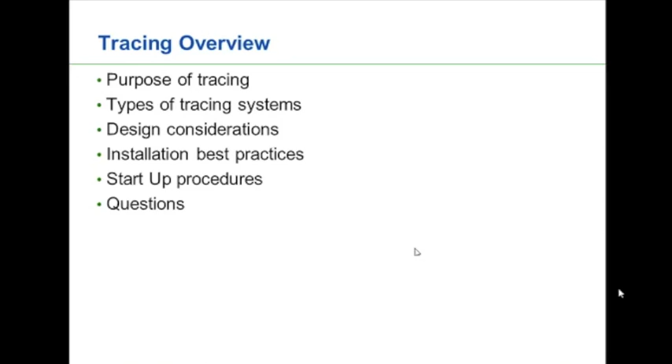Some of the things that you can actually find as you get into some of the really low temperatures, you move up into the Yukon, the Northwest Territories, Alaska, places like that, we might even see tracing put in on steel girders and steel beams to help prevent structural failures due to the really low temperatures that you can see up in that part of the world.

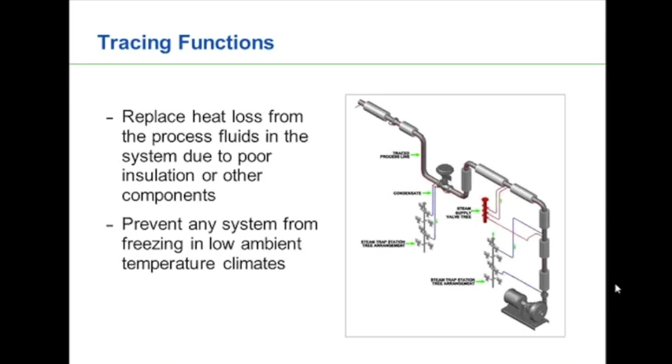It's a very, very efficient way to run tracing. All the exterior surface of that tracing tube is exposed to the process fluid. So obviously we're getting a lot of heat transfer there. We're not relying on a single point contact. We do see it once in a while. It's not that common anymore. And the reason that it's not that common anymore is because it's very difficult to install and to maintain.

You can imagine we have to set this up as we're setting our piping up. We have to find some way to support that gut tracer inside the system. That's not always the easiest to do without restricting flow or creating potential problems. Maintenance obviously is going to be an issue. The only way that we can maintain that line is by getting into the pipe, which means we have to shut the system down in order to get in there. If there's any leaks or any other problems with it, we may not know about it until it's too late.

So this type of tracing is very, very limited in application these days. The only time that we ever really see it would be for sulfur. That's probably the most common one that we run into, or something where the temperature is very, very critical. So fairly minimal usage, but it is still out there once in a while.

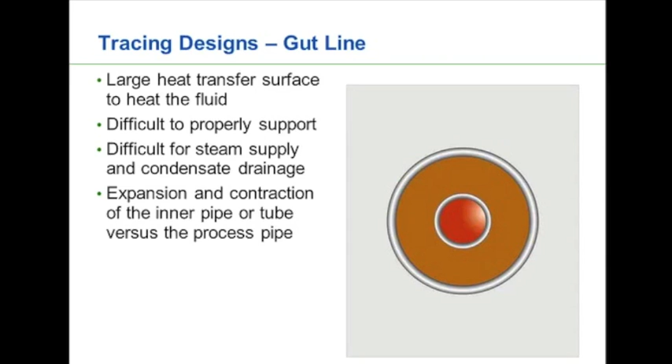The next type that we see, again, not the most common one out there, but something that does pop up, is the jacketed design. And we see this on pipe, and we also see it on vessels, especially if we're using it to heat up a small tank of something. We see that in the food and pharmaceutical industry a fair bit, where we have jacketed tanks or jacketed piping.

There are a number of benefits to this. One, again, we do have high energy addition, so most of that energy is being directed into that pipe, so we have a large surface area for the heat transfer to take place, so it does improve the efficiency. We do have to make sure that it is insulated properly because we're obviously going to have some radiant loss coming off the outside of that pipe. So it's not as efficient as a gut system, but it's still one of the more efficient systems that are out there. Disadvantages with a system like that is it can be very expensive to set up and install.

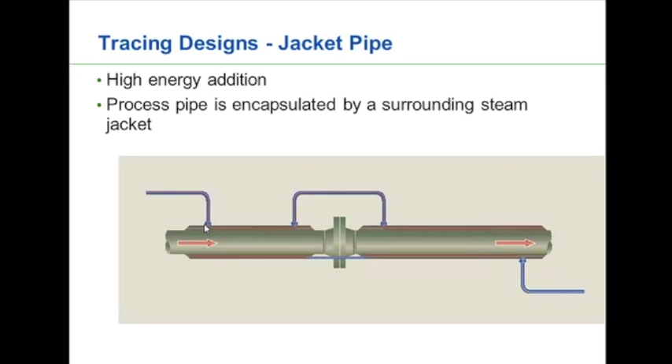This is probably the most common design that we see out there at the moment. It's just a bare tube tracer. And the majority of facilities that we run into now where you are running some type of tracing, be it glycol, be it steam, this is the sort of design that you're going to see. It has a number of advantages over the previous two systems where it's very easy to install. The maintenance on it and the ability to make changes to the system, it's very conducive to doing that. And it is a very reliable system. We generally have minimal connections because we're running endless tubes, so there are fewer connections to deal with and have potential leak points in it.

The negative with the system, though, is there is relatively low heat transfer, especially when we look at the surface area. Heat's going to be transferred primarily through the contact points. So if we do have any space between the tubing, we're not going to have a direct contact point to allow that heat to transfer. So if there are air gaps and things, the efficiency significantly drops. We're going to wrap that pipe and tracer in insulation, so some of that heat is captured and radiated back into the line, so we do see some energy efficiencies and savings there. But as far as comparative to the gut design and the jacketed design, it's certainly nowhere near as efficient.

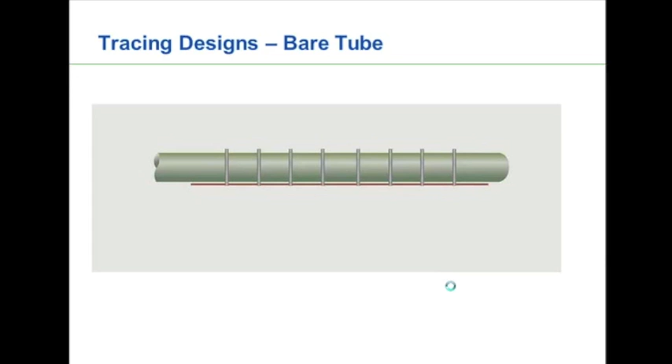Having said that, though, there are some things that we can do to improve the efficiency of the system. One of them is to use a heat transfer material or heat transfer cement, and we'll talk about those a little bit as we get into this further. So those are the three main types of tracing that are out there. When we're selecting the tracing that we want to do and how we're actually going to trace and which fluids we're going to use, there's a few things that we really want to look at as we're making our decision how we're setting the system.

So some of the things that we're going to need to consider, one is going to be the startup time. Obviously, as we're starting a system up from a fairly cool state to the warm state, we're going to need more energy to create that increase in temperature. Once the system's up and running and we're just maintaining it, it's certainly not as much effort or energy required to keep the system in that. So if we have a system that we're bringing down and starting up a couple times a day, we may need something that's going to allow us to bring the system up fairly quickly.

Conversely, if it's something where we're just putting it in for freeze protection, we know that we're going to be running it through the entire winter. We can start now and bring systems up and give them a day or so to come up to operating temperature and have no issues with it. We're not going to need as many tracing lines or something that's going to heat up as quickly as we would with something that has to start up once or twice a day or even more than that.

We also want to look at the fluid that's going through the main lines, the process lines. What are our temperatures that we're going to be dealing with there? Are we just looking for freeze protection? Are we looking to keep that process temperature at a specific temperature? And if so, what is that range? And if we're dealing with that, then that's going to determine the type of fluids or the type of tracing that we're going to deal with.

If we're dealing with lower temperatures and maybe just freeze protection, well, we can use electricity, we can use steam, we can use glycol, we can use any of those to keep that freeze protection in place. As we get into higher and higher temperatures, our choices become more and more limited. As soon as you get in some of the higher ones, maybe you are restricted to glycol or steam, and as you get into the extremely high temperatures, glycol may even boil off. So at that point, we're going to want to be looking at a steam system to provide it.

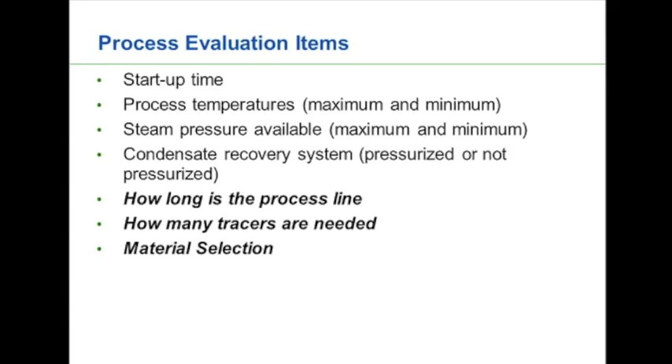We also want to look at how long the process line is. That's going to help determine the number of tracers we need on the system. Are we going to run a single tracer? Are we going to run multiple tracers? And then we're also going to want to look at the material selection that's on the system as well.

Anytime we're dealing with pressures over 15 psi, we are under the ASME code. There's maybe 1 or 2 states out there that don't deal with ASME, but 99% of what we're dealing with around North America is going to require us to be under the B31.1, B31.3 code. And all of that tells us we have to have specific materials, and the designs have to be of a standard that allow us to operate safely.

We don't want to be using garden hose as the tracer. You can laugh about it, but I have actually seen it out there where people are running rubber hose and things that are not rated for the steam pressures. You think, well, I'm only running 20 psi or 30 psi. There's an awful lot of energy stored in that steam at that pressure, or that condensate at that pressure. So we have to make sure that we are using the correct materials and have correct designs in place.

One of the other components that we really want to specify on is the valves. When we look at valves, we want to specify, at a minimum, a Class 4 shutoff valve. Valves will have a 6-class shutoff system. Class 1 is basically an agreement between the manufacturer and the supplier that I'm going to give you something. It's going to have some end connections on it. It's going to have a handle on it, and it may or may not restrict flow to some level. Those are the valves that you pick up in the discount stores for $2 or $3 for a 1-inch valve. You're getting what you pay for.

A Class 4 shutoff valve will allow 0.01% of that rated valve capacity to come across that valve seat, and that valve is still considered leak tight. So even with a Class 4 shutoff valve, it's still leaking across the seat. But it's a very, very minimal amount, and it's something that we can work downstream of and feel safe about. One of the things that's really nice with the tracing systems is because we're generally dealing with lower pressures or lower temperatures, we can often get away with a Class 6 valve. And the main difference between a Class 4 valve and a Class 6 valve is Class 4 is about as good of a shutoff as you're going to get with an all-metal seated valve or all-metal components in that valve.

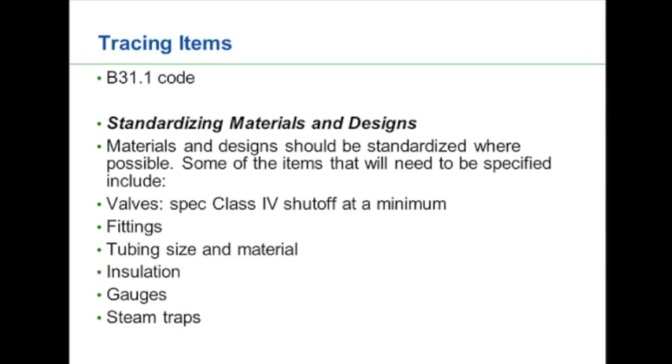And then the last thing we're going to look at is the steam traps. It's kind of the end point, especially if we're running a steam system. That's the end point of the steam line as we're coming off the tracing. So we want to make sure, again, we've got standards for the steam traps and keep the supply folks happy by minimizing the amount of inventory we have to keep in stores.

Okay. So what we're looking at here is a typical tracing line. When we're coming in, we're going to come off the steam line right at the top here. We always come off the top of our steam header, because it allows for a clean, dry vapor to come off. If I'm coming off the bottom of the steam line down here, then if there is any condensate or corrosion material accumulation in the line, that can drop into my tracing line and cause some potential for fouling or plug-ups or water hammer. By coming off the top of that line, we're going to dramatically improve the quality of the steam that we're running in our tracing system. We also want to make sure that whether we're running steam or glycol as our primary tracing fluid, we're coming off a dedicated line.

We don't want to be coming off the steam supply line that's going to, say, an air handler or a piece of process equipment. Because if I have to shut that piece of process equipment down, then obviously my tracing is going to get shut down as well. So I want that steam line to be one of the main steam lines that I'm using, so it can't be shut down, so I don't have to worry about losing my tracing if one piece of equipment comes down.

After I come off that steam line, I'm going to jump into what's called a jumper, going between the steam line and the point at which the tracer is attached to the pipe. At that point, I want to try and keep that as short as possible. Sometimes it does have to be a bit longer in order to get out to where it's going, but keep it as short as possible. And I want to make sure that it's insulated as well.

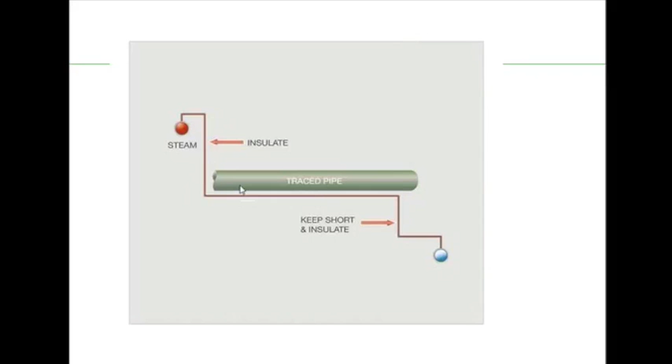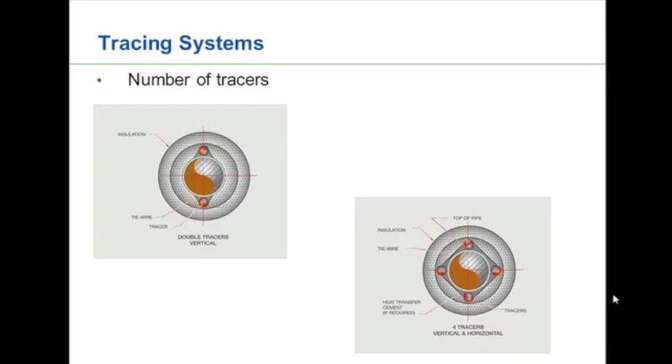If we're looking at the number of tracers, there's going to be a couple of different positions that we want to run those tracers in. Generally, they want to be installed at the bottom of the piping. The reason that we put it at the bottom of the piping is basic engineering, that heat's going to rise. So we want to make sure that the heat's allowed to rise up. If I put those tracers near the top of the pipe, then obviously I'm not heating as efficiently as I possibly could.

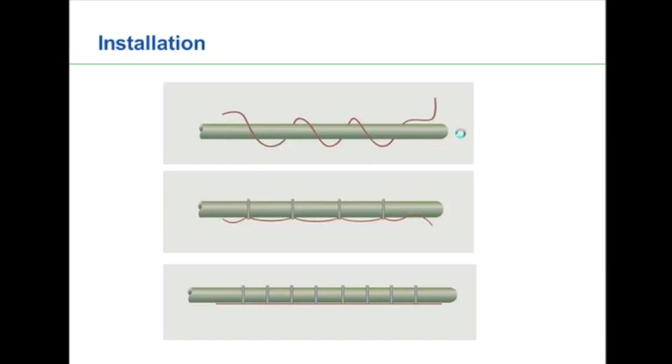It can be kind of messy, so most people will go with the preformed. Licorice is a common term for it. It feels kind of like recycled rubber when you're looking at it. And then there's an aluminum channel that goes over top of that.

And what happens is as you put that on, snap it in place, and then bend that all down to the pipe, then when you start your system up, as the steam or the glycol starts to heat that tracing line up, it causes that heat transfer cement to liquefy and flow all around that tracer and connect to the pipe. And then as it heats up a little bit more, it actually turns into a very hard cement. It's almost a stone kind of feeling material.

And that will allow the tracer to direct its energy much more efficiently into the pipe. It's calculated out that one of these tracers with the heat transfer cement on it is the equivalent to 3 or 4 bare tracers, so it is a lot more efficient from that standpoint.

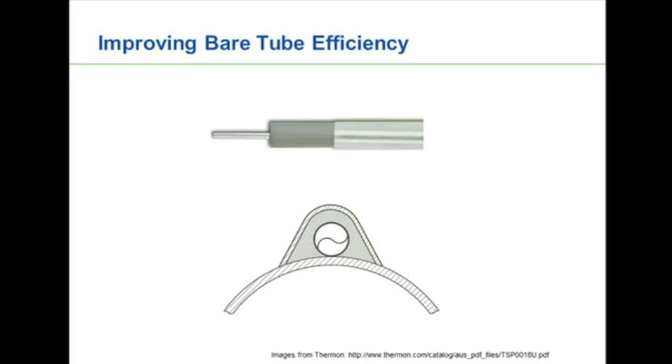And what pops up is if we are dealing with small tracing lines or small process lines, we can actually get pre-engineered solutions. There's a number of different companies out there that can do this, and there's a number of different designs. The nice thing with something like this, if I'm dealing with a process line that's 1/2 inch, 3/4 inch, even up to 1 inch, we can get into some of these solutions.

And the companies that manufacture them do an extremely good job with the engineering side of it. So you basically give them your parameters, what temperatures you need to maintain, what your operating conditions are, what your ambient conditions are, and they will come back with a solution for you, and you can get endless rolls of this, several hundred feet long, that will allow you to put this stuff out very simply, very efficiently. It costs you a little bit more for the material side of things, but by the time you figure the installation costs, your savings are fairly significant.

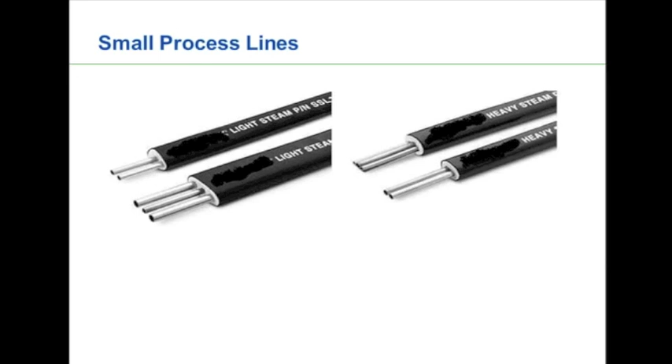You can see by the picture up there, there's a couple that they've got. They've got a light steam and a heavy steam. It doesn't have to be steam. I can run glycol. They'll do an electrical solution as well, where you can run electrical tape along it. The main difference being on the light steam, if you look between the tubes, there's actually some space. On a heavy steam, it's just referring to the fact that the tubes are in contact, so we've maximized our heat transfer through that system.

One of the best ways to maximize the efficiency in the system is to try and capture some of the steam that would generally be wasted. So if there is a chance to catch some flash steam from a higher pressure application and bring it in through a flash tank and drop my pressure down to 20, 30, 50 PSI or 5 PSI, one of the lower pressures, and use that flash steam, I really maximize the efficiency of my system.

I mentioned the thermal cycle when we started out here, and anything that we can do to pull the BTUs out of the system and prevent them from being vented to the atmosphere is going to dramatically increase the efficiency of our system. So anything we can do, like capturing flash steam and using it for the tracers, big savings are available there. One of the other things that we notice as well when we're dealing with tracers is people tend to start them up.

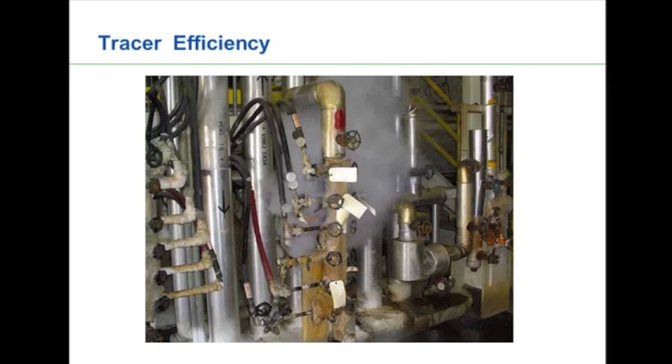So anytime that we can fix it, we want to be maintaining these things on a regular basis. We want to be testing those traps on a regular basis and continuing on from there. When we start the system up, we want to make sure we're doing a few things as well. First off, do we have a written procedure? We don't want to just go out there, start opening valves, okay, it's on, walk away, wait until we see our first cold day and then run into some problems.

The standard operating procedure or written procedure, do we have a form for that? Does the plant have one already set up? If not, we should probably look at getting one. Some of the things you want to consider when you're looking at your standard operating procedure is make sure you lay out how many people you're going to need.

That's going to vary. If you're in a situation where your supply header and your return header are in close proximity to each other and everything's laid out nice and clear and labeled properly, well, maybe you can get away with one person opening the supply, opening the return valve, blowing the strainers down on the steam traps if you're running steam, and being able to do everything by themselves.

If your supply line and tracer or return line are a long distance apart, 100 or some feet apart, or even more than that in some cases if we don't have the system laid out properly, well, then in that case, we're going to want multiple people, and we're going to want to make sure they've got a way to communicate efficiently. So do they have radios?

We want to think about the safety equipment that's going to be required as well. Obviously hard hat, safety glasses, steel-toed boots, long sleeves are all pretty good common sense things, but are we going to need anything else? Are there areas that we're going into where we maybe need gas monitors or things along those lines? Okay. We definitely want to do a pre-startup meeting so everybody's aware of what we're doing. And you're going to walk through the system as well. So before you even start opening one valve, you want to walk through that system.

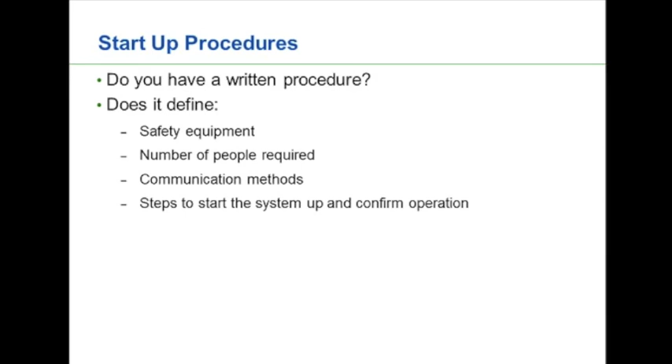Okay, I see one's popped up here. What type of tracing is the most efficient, electrical, thermal fluid, or steam? That's going to depend a little bit on a number of different factors. Obviously, if you have steam readily available in a plant, steam tends to be one of the more efficient systems to use. If you don't have steam in your plant, then obviously it's going to be a lot more expensive because now you're looking at installing a boiler, in which case electrical or glycol or a Dowtherm or some other thermal fluid are going to give you a better choice. So again, depends a little bit on what you have available to you.

Electrical is generally a fairly inexpensive one to use if you're using shorter runs or it's not a real common thing to do, but it does have some limitations for intrinsic safety in certain areas of the facility. It's not always the most efficient system to run in there, and it can be somewhat expensive to install. You sometimes have to get special equipment and things to install in there.

Length of tracers, somebody's asking why 100 feet for the length of tracer. Generally, that's going to refer to a steam system. With 100 feet as a maximum length on the tracer, we can guarantee that we're not going to change phase from the vapor to the liquid too early in the process where we're just running condensate down the bulk of that tracing line. When we're doing tracing with steam, we want the latent energy, the phase change energy of that steam, to be given up in the tracer. That's what does most of the heating.